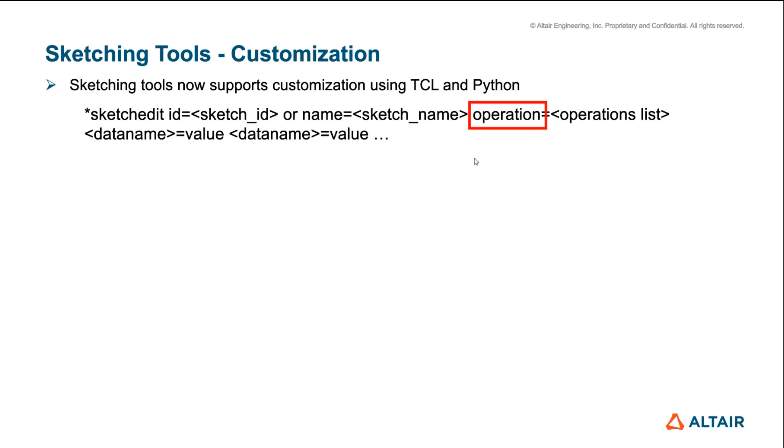When it comes to operations, these are the operations that we support. For example, adding a sketch or adding an entity, modifying an entity, splitting, fillets and offsets, and so on.

We are also doing extensive documentation on this along with examples. I'm not sure if we can get it through, because there's quite a bit of things that needs to be hashed out from the official documentation perspective, but I do have scripts as well as a PowerPoint if someone is interested in knowing more about this command and how to make use of it.

The other data name is basically on what entity you want to do that operation on. These are the data names, the entities that we are supporting, like points, lines, circles. So you can add a point, or you can add a line, or you can modify a circle. That's how these things are written.

Depending on the entity, you can give and provide a value. So what that means is that if I want to create a line, typically it requires 2 points to draw a line between. You would create those points first, provide that point data to line as a starting position and ending position. These are some of the things we do which are more intuitive, in a sense that you would know what is required and what is supported within Sketch to draw a line or to draw a circle.

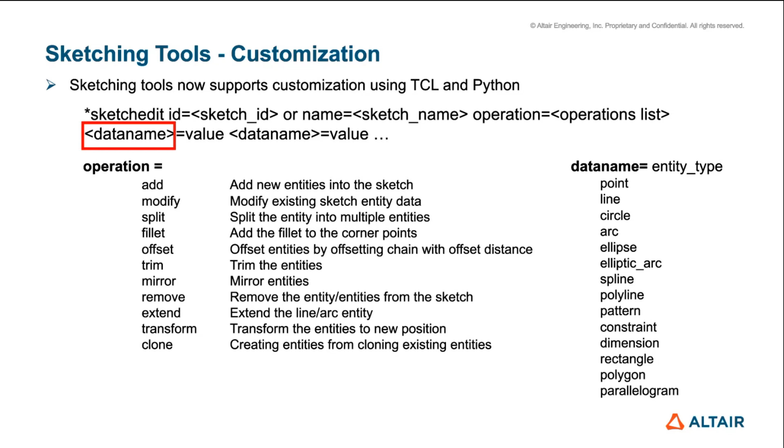Those are the arguments that are provided once you define that you want to add a circle, for example. So here is an example of creating a circle using the star sketch edit command. Since whatever I'm typing is not visible, I am also typing a command here. First you would create an entity, or you would add a sketch.

I'm giving the name of the sketch here, and then you add your sketch by defining a new plane. You are defining a plane origin, like where you want your plane to be, what's your plane normal, and your plane x direction. Then you would get the ID of that sketch that you have created so that you can pass this ID to the star sketch edit command.

You provide the ID, you say the operation you want is to add a circle, and then what are the creation methods for circle that I'm using here is the circle with center position and radius. So you give the center position coordinates and then the radius. This is as simple as, while I'm talking itself, I'm explaining what and how this command is useful.

This is how you can get most of the entities to add or modify within Sketch. If you have further questions or need a detailed PowerPoint, I do have it. I'm not sure how much of it will make the documentation in this release, but I have all the background information if someone is interested in knowing.

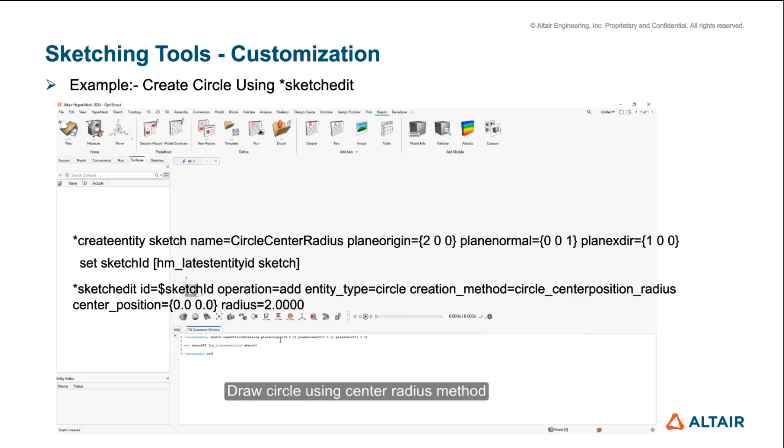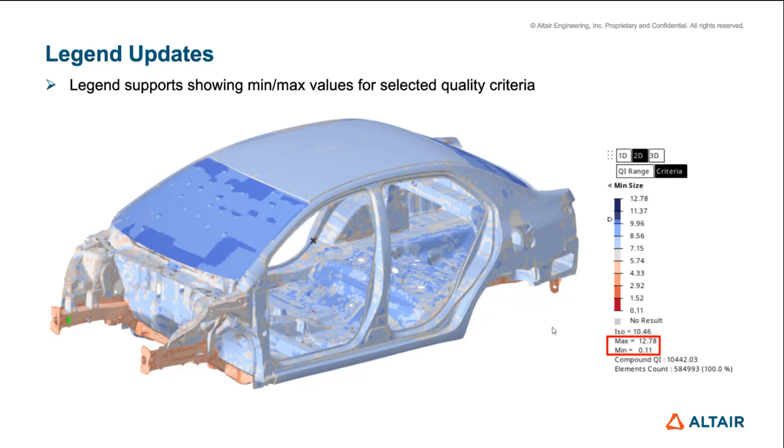A small minor enhancement here on the legend positioning. You can see on the left side before 2024, as you're scrolling up and down the slider, the legend is moving left and right. Based on the element count, it is trying to adjust this value, and if it's huge, it becomes a problem as it keeps moving left and right, aligning to the right of the screen. So we have taken it out.

What we do now is that if the element count is increasing based on your slider position, we move it to the left. But if the slider is moved down, we don't position it to the right. That way it gives stability to the legend. Just based on the element count, it can move to the left and adjust the spacing, but after that you don't see this moving back and forth. Just a minor enhancement.

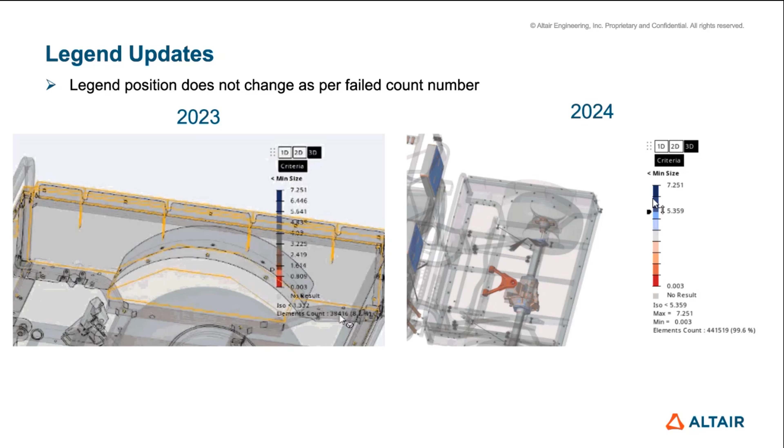On the defeaturing of the fillets, this is actually a big project in the sense that fillets and removal of the fillets are always challenging, even using the Parasolid kernel. So even for a CAD software, I would like to clarify this: removing of the fillets is not an easy job, even though you create those fillets within that CAD tool itself. Oftentimes it comes because there are a lot of merging fillets, fillet chains going in different directions, and it becomes challenging to remove these fillets. So we are trying to add and improve the workflow of the defeaturing of the fillets.

What I have realized is that most of the times you're about to remove about 60 to 70% of the fillets, but there will be some challenging fillets that you cannot remove. So we have obviously added the use Parasolid option, but even that is not enough sometimes. So we need to provide some semi-automatic approach of removing the fillets. This is just one small step towards it. What we do now, let me play this video, is that we have added this option called process fillet chains.

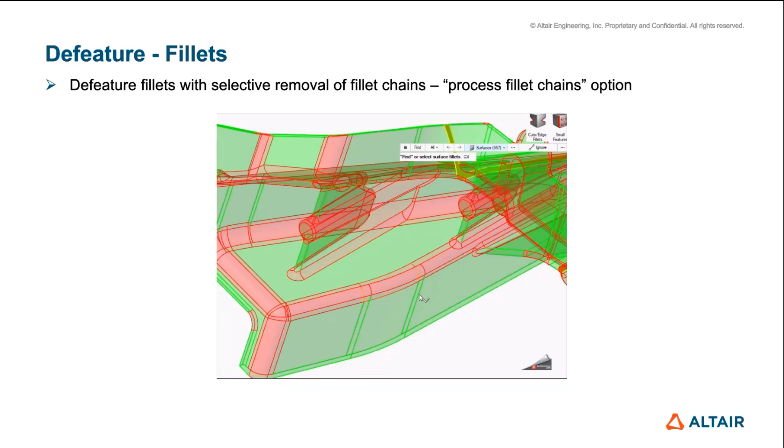Going forward, we would provide some more tools on removing of the fillets manually or semi-automatically, because typically what happens in the defeaturing is that you would delete that fillet, and then you will try to extend the other two surfaces perpendicular to each other, so that you can get that corner, the perfect corner that you're looking for.

I also would like to warn you that if you're trying to remove a fillet chain and you're not able to remove that, within the code itself you can try unchecking the process fillet chain option. But whether you turn this option on or off, if that fillet cannot be removed, there is no way you can magically remove it with this option. Sometimes partial fillets can be removed, but the software doesn't allow you because it is processing the whole fillet chain.

So that's where this option is useful. I would like to also tell you that if you turn this on or off and you're trying to remove a certain region of the fillet, and if it doesn't get removed, don't think that this option is not working, because it is quite possible that even without this option, originally itself, that part of the fillet would not have been possible to be removed. So just a note on that one.

Moving forward, under the line mesh, we are also now supporting node selection, which we were only doing for lines before, and our old panels were supporting node selection as well. So now we have added a node list selection so that you can easily select nodes and create 1D elements from it, or line mesh from it.

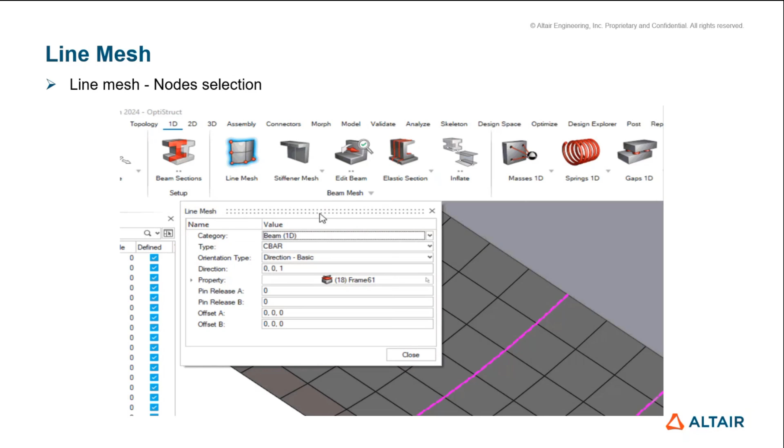Hello everyone, my name is Salim and I'll be discussing some of the meshing developments we have done for 2024. The major development is towards FE geometry. We are trying to bring FE geometry as close to CAD so that we reduce a lot of mesh editing time. So majority of the development is towards that, and there has also been development towards component removal. Maybe we can discuss through that in detail.

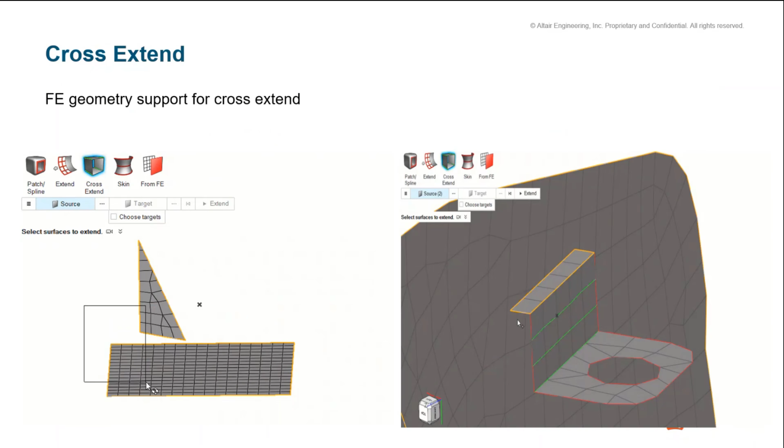So this is one such example where we see FE geometry was not supported before. This is cross extend, where we had no support for FE geometry. Now we have supported this, and also we have removed CAD and FE options in the hamburger menu because we didn't want separate CAD and FE tabs. We wanted it to be as close as possible. So all the options that were supported for CAD are now also supported for FE geometry, and this helps us in quickly editing the mesh.

For example, where we have a clip which isn't connected to the base, the user could just pick the clip and base and then connect it using cross extend. So this is just a one click process. Same goes here where we have a rib and the base, and we are trying to connect using cross extend, and all of the options that were in the hamburger menu are now supported for FE geometry as well.

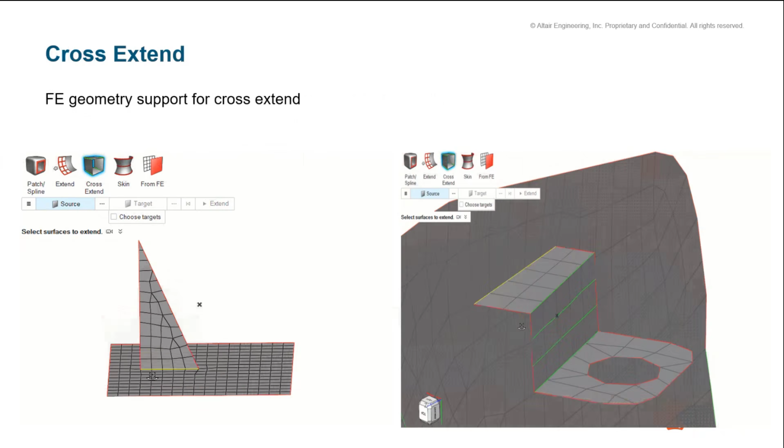Going further, there has been quite a bit of enhancement in Stitch. Earlier, we had Stitch support for FE geometry, but it wasn't working the way it was expected to, and it wasn't giving us the right results, especially when it comes to the stitch and intersect option. So we have improved that.

This really saves a lot of time when we are editing mesh, which is coming either from mid mesh or in general FE geometry. This is in a direction where we want to remove the usage of orphan mesh, and we want to use FE geometry more and more, and use all of these tools to reduce our mesh editing time. Not just that, it also helps us maintain node associativity, which will help us eventually when we are coming across engineering properties and all of that.

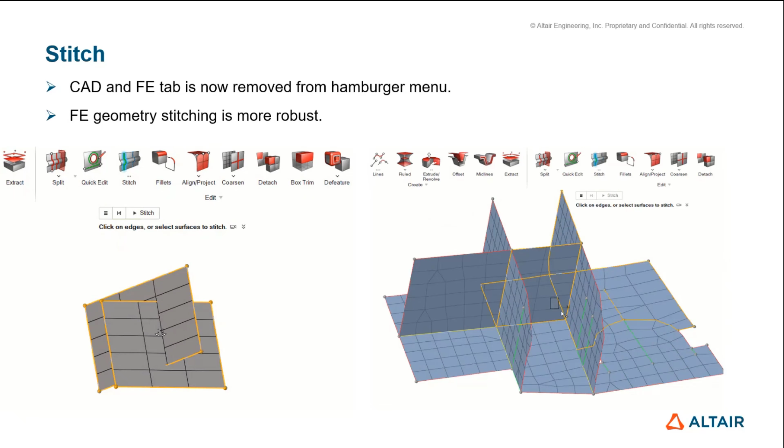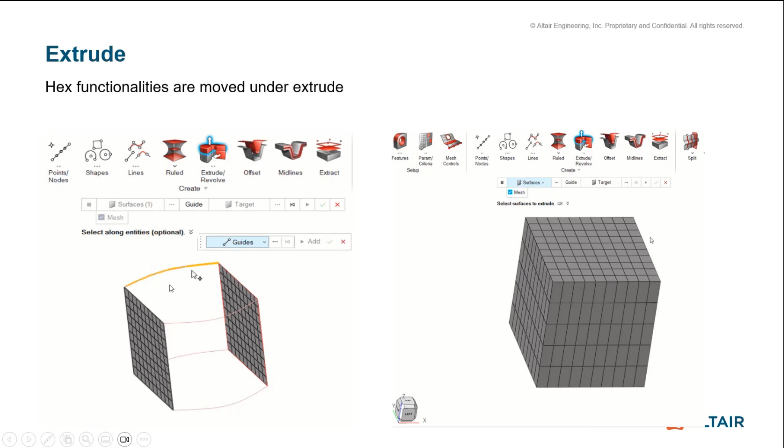In fact, towards that direction, we have also improved extrude. Basically, we had the hex tool, which we removed, and all the functionality from hex has been moved to extrude now. So in extrude, there is a mesh checkbox now. In fact, you had this mesh checkbox before, but now it not just creates the bounding mesh, it is also capable of creating hex mesh.

Also, you would see more selectors now, not just surface, lines and nodes. You would also see facets and elements wherein you can extrude that. So hex in a way had a separate tool altogether, but basically what we were doing is the same as extrude. So in a way, we are also simplifying the workflow for the user and helping him understand the extrude workflows and simplifying the hex workflows as well.

So a user can pick surfaces, whether it's source and optionally target, and the user can also pick guides, whether it could be multiple guides or single guides, and it could be just lines, or it can also be facets or other guides as well.

Apart from that, we have also developed towards creating solid along with the hex elements. Earlier we were just creating hex elements, which was kind of orphan mesh. So we want to get away from orphan meshes. So we also create solid along with the elements, and we try to associate those elements to the solid so that we always have geometry associated to mesh.

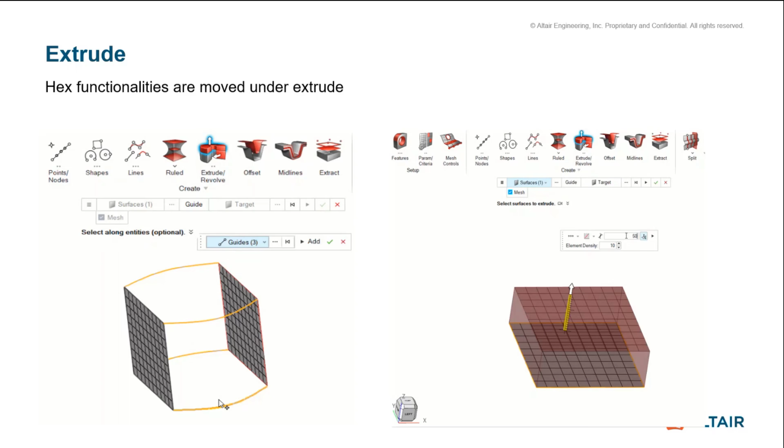This works the same with FE geometry and CAD as well. Currently there is no support of solid creation for facets and elements, but if the user is picking surface, he would always see solid getting created along with the surfaces. But if the user is picking facets and elements, they would see orphan meshes, which we want to get away from, and we want to further improve this going forward.

So this is development towards extrude, and we have also had developments for features support on FE geometry. Earlier, whenever we were detecting features for FE geometry, it would have created FE features. Now it creates a geometry feature. For example, if we are running auto detection, it would create geometry features for FE geometry holes, and we are creating geometry features manually. We also create geometry features for fillets, holes, flanges, and logos. So there has been quite a bit of enhancement in FE geometry as well.

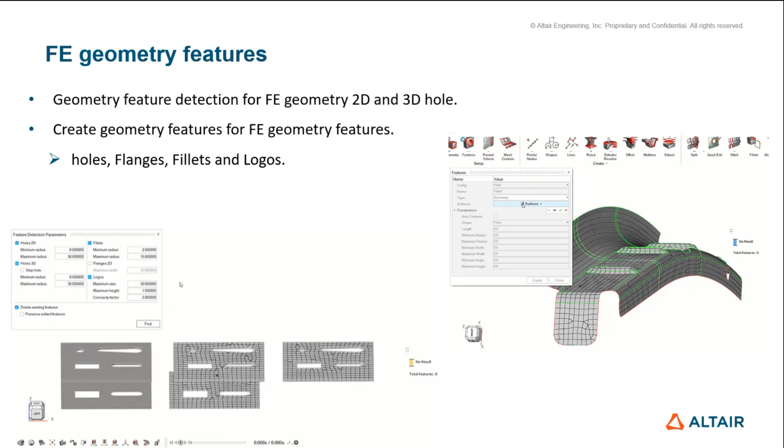This will help us whenever we are going for treatment on the mesh using FE geometry. There has been a good amount of improvement, especially in adjusting the normals, with auto adjustment of the normals. It works as good as orphan mesh, in fact even better. The auto adjustment, if we are using element as the reference, we would do it by connectivity, or if the user is doing it by vector, they would see that it's aligned to that vector direction. Apart from that, if there is just auto adjustment, it would work just the way it used to work for orphan meshes.

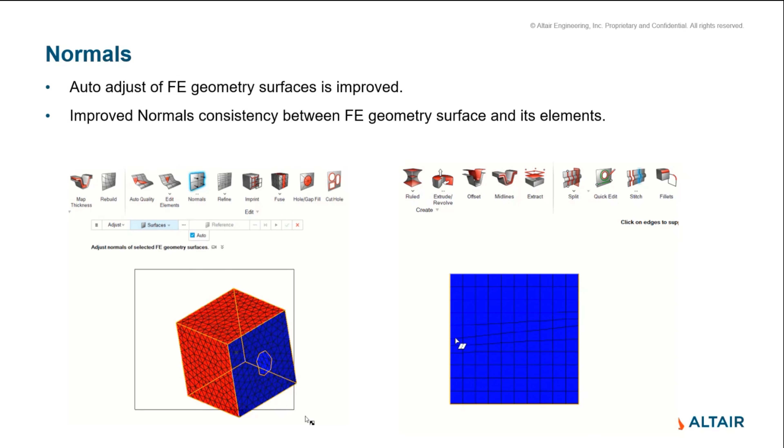Along with that, there have been a few more enhancements. For example, when we are trying to combine surfaces, we also now automatically adjust the mesh as per the surfaces for FE geometry, so that there is no inconsistency between geometry and mesh. So all these are towards making FE geometry more stable and more usable, and also reducing our mesh editing time. We have also added support for offset on FE geometry, which wasn't supported before.

Users can pick a surface, define an offset value, and offset it, similar to how they used to do it for CAD. The same way, they can do it for FE geometry as well.

As I mentioned earlier, there have been developments towards removing the component in the future, and this is in the same direction. I think in 23.1 we developed geometry tools to obey the global preference. We had added the global preference only for current and original before. Now we've added a new option where the user can use this whenever new geometry needs to be created and placed in a new component. This new part option will not just create a component, it will also create a part and maintain the right hierarchy, which helps us remove the component easily going forward.

So all of these tools now obey these options - ruled, extrude, revolve, offset, patch, spline, skin, mid surface, midline, and mid mesh. All of these tools obey the global preference here. We want to further improve this for support of shapes, lines, and solids to obey this, and also Sketcher. But for now, all of these tools obey these options.

There have been a few changes for mid surface, midlines, and mid mesh. We don't support multiple components created under the same part - for example, we don't have multiple mid surfaces or mid mesh from different parts placed under the same component. That has been removed now. So each of its representations will be either created in its own part, or when the option is new for each of those parts, it will create a new part and place the mid surface, midline, or mid mesh in the same component or the same part.

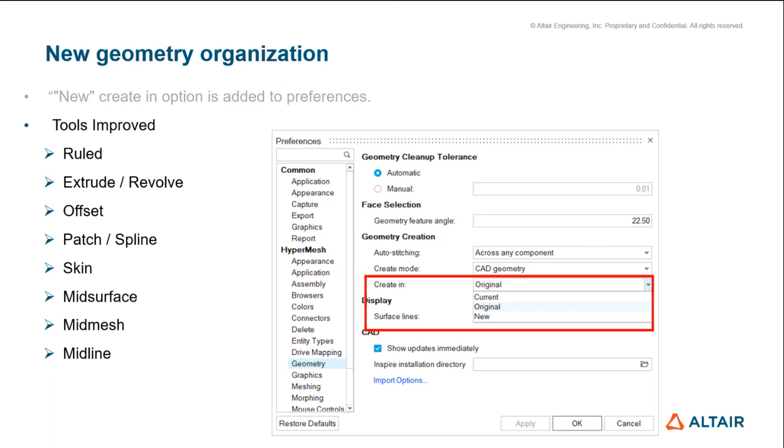So there have been a few developments towards this, and we will work towards improving this further and adding support for other tools as well. So this is about it. I might probably go through some demos here just to talk through whatever I've spoken about now.

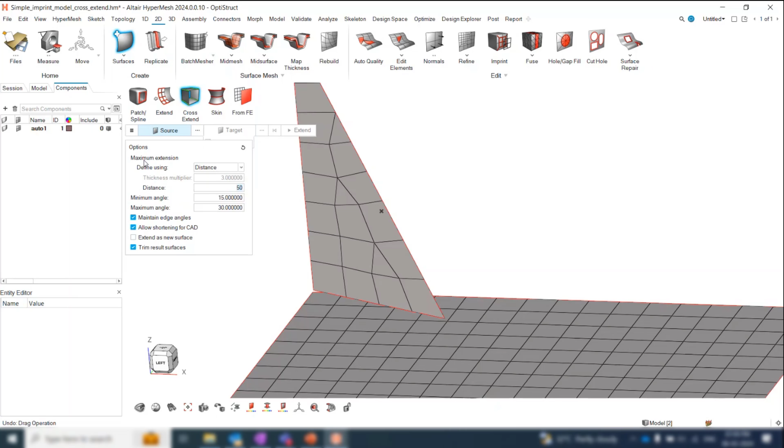So if you go to 2D and cross extend, you would not see FE and CAD tabs. You can see all of these tools, all of these options obey for FE geometry except for this one, which is mentioned as for CAD. But if I pick this, I can extend this - I've also mentioned about extrude. So we can pick a surface and extrude it, and you would see the solid getting created, not just the mesh. If I pick it as the solid, you would see there is a solid created on this.

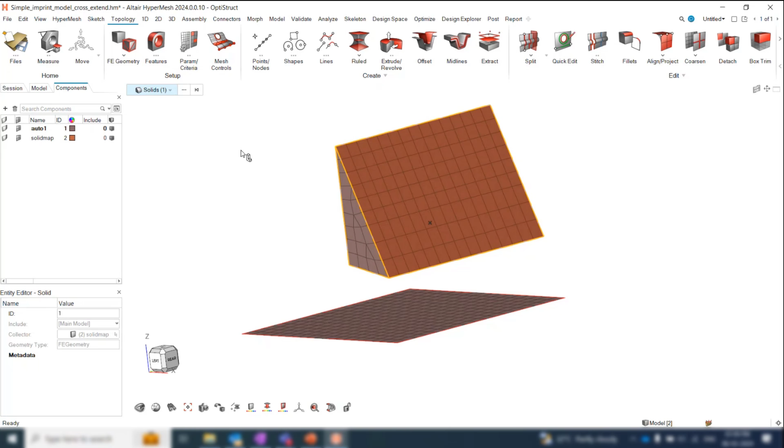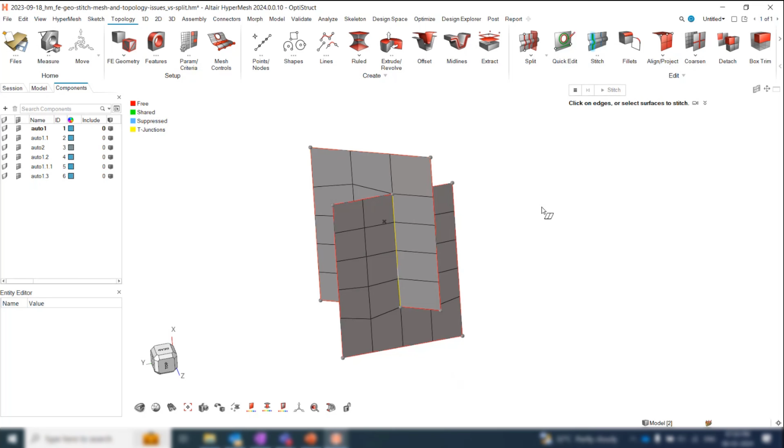I also spoke about stitch. In these cases where we have stitch and intersect, we can pick this and stitch it - now you would see this. In fact, when we made rebuild the default in the preferences, it will give us the expected output always. So this is also towards that direction.

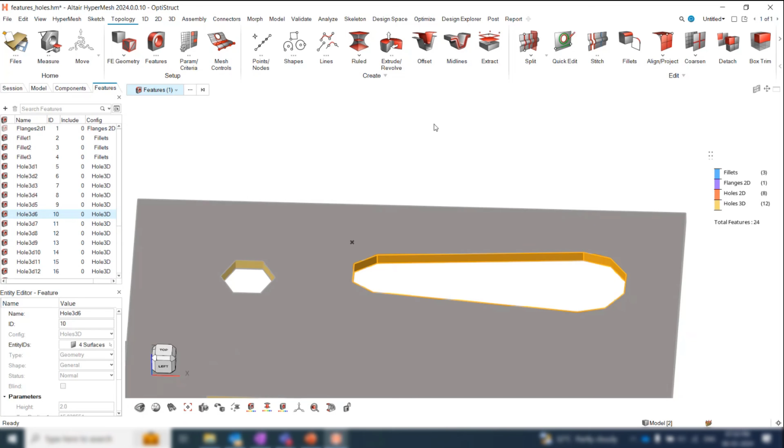With respect to FE geometry stuff for features, I can detect features. As I said, auto detection will work for holes. Now you would see this being treated as a CAD feature, a geometry feature, rather than an FE feature, which will help us treat the feature better going forward, whether it's rebuild or right from mid-mesh extraction. And when we move towards rep and feature controls, as Tim mentioned, all of this will be supported - this is a good step towards that direction.

In the last notes for 24.0 for morphing, we have significantly improved the domain-based morphing import/export. If you ever saved a model with domains in it, trying to reload that HM binary file was very, very slow. That's now much faster - when we benchmarked a full body in white, pre-24 it was over an hour to load the binary file. In 24, it's about a minute.

The improvements to the domain-based morphing mean that free and proximity morph should now be significantly faster. The alter dimensions tool is now significantly faster too. So again, if you were to create domains over an entire car body and then tried to use the alter dimension tools on one hole, pre-24 it would take over an hour to alter one hole dimension. In 24, it takes 5 seconds, if that.

If you've used a lot of the tools before, you'll notice what we called this 2-stage morphing - you'd complete a morph and then you'd see it do a bunch of processing at the end of the morph operation to reapply the morph. That's now been removed. So you should see some performance improvements from that perspective as well.